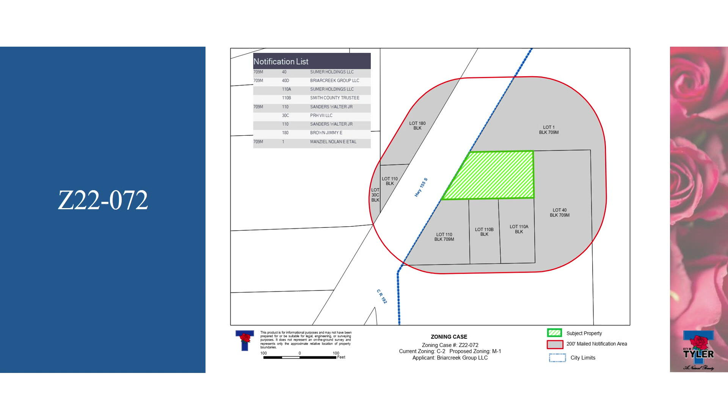All right, thank you. Any questions for city staff? If not, I have a card from Mr. Hines. Mr. Hines is available for questions. Any questions from Mr. Hines?

If not, is there a motion? Mr. Chairman, I make a motion that we approve Z 22-072. Second. Motion's been made and seconded to approve this item. I didn't ask if there are others who have questions or comments on this item. Are there? If not, the motion's been made and seconded to approve this item. Any discussion? All those in favor say aye. Aye. Any opposed? Item's approved.

Next, with the approval of the commission, I'm going to move item PD 22-023, Mother Frances Regional Hospital, up. Kyle? Yes, sir. This is a zone change request from AG Agricultural Zoning to PMF Planned Multifamily Residential.

The applicant's proposing to develop a multifamily development on this property, in the cottage housing style. These are units that are primarily detached, but on a single lot, so they do function as a multifamily development.

The adjacent properties within the city limits are also zoned for agricultural, as they were zoned that way when the property was annexed, so there's no other zoning at this time. Outside the city limits, properties are developed with a mixture of industrial and some residential uses, but this area is primarily undeveloped.

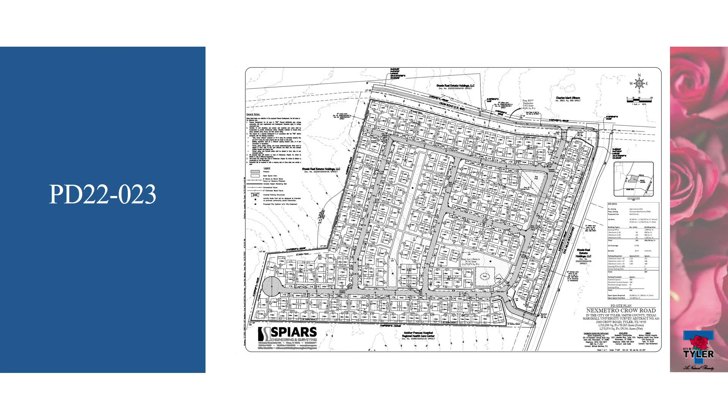As you can see, there are single-family units and some attached one-bedroom units on this site plan, located along the internal drive within the development as well as offset from that. These are the proposed units, 1 to 3 bedroom units with this development. The property will have access to Crow Road as well as Oak Hill Boulevard.

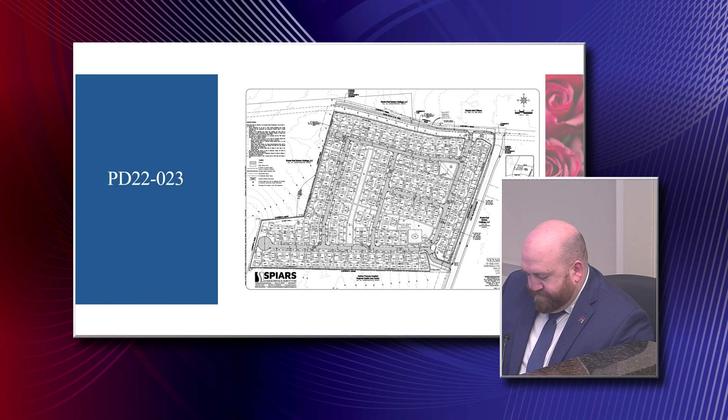Of the notices sent out, 2 were returned in favor, 0 in opposition. When we sent out the packet, we had some concerns about off-site drainage. The applicant has spoken to the neighboring properties and they're in communication on how that will work out. At this time there's no opposition to the proposed land use, and staff has reviewed the application and recommends approval.

Kyle, our packet shows an issue with stormwater runoff, but also with utilities. I didn't hear you speak about utilities. Have all the protests been pulled? Yes, that's correct. Okay, just wanted to confirm.

Are there persons here who'd like to speak on this item, for or against? Yes, sir, if you'd come to the microphone and state your name and the rest for the record.

Good evening, Chair and Commissioners. My name is Josh Eady, Vice President of Development for NexMetro Communities. We are the applicant on this case, 2221 Lakeside Boulevard in Richardson. I've signed in as a speaker, so it should be on there.

Kyle, I sent in a presentation—do you know if that got queued up? If not, I can just walk through it. This is fairly straightforward, and it's better for questions anyway.

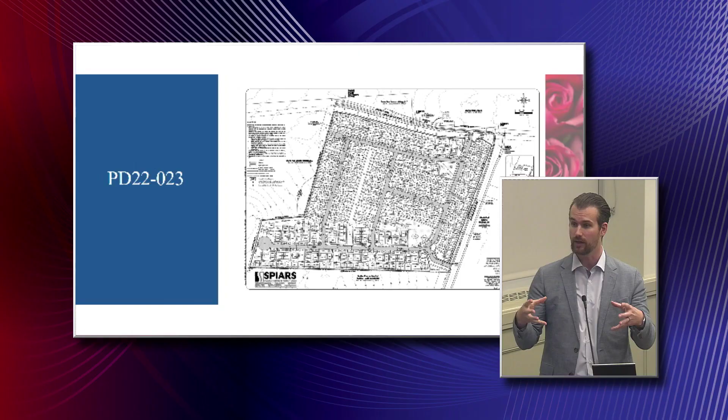This will be platted as one lot, so it will go through dedicating all of our fire lanes, utilities, and those sorts of things, just like commercial development. The leasing center, which is occupiable, will pull a commercial permit, unlocking the civil development there. The individual homes are residential permits you'd pull just like a neighborhood—so it's a bit of a unique combination.

Well, thanks. Any other questions, commissioners? All right, thank you, sir, for your time and presence here.

Are there others who would like to speak on this item, for or against? Any discussion? If not, is there a motion? Mr. Chairman, I'd like to make a motion that we approve PD 22-023. Second. Motion's been made and seconded to approve this item. Any discussion? If not, all those in favor say aye. Aye. Any opposed? Item's approved.

Good luck with your project and welcome to Tyler. We're now going back to the regular order, which is PD 22-024, the Blue Pinnacle Group, and thanks everyone for your indulgence with this slight change in the schedule.

Kyle? Lloyd, is this on? Yeah, we're on. Torelli's going to present this.

This is a zone change request from AG Agricultural District, C1 Light Commercial District, with a bit of PCD (Planned Commercial District) and PMF (Planned Multifamily). They're combining all of that, and requesting a zone change to PMF with the site plan.

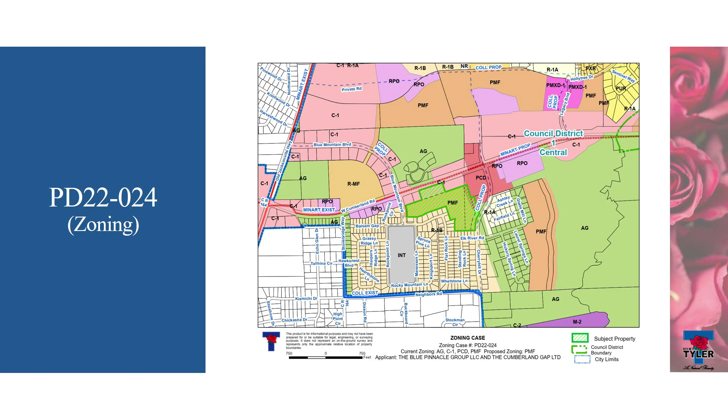Looking at the surrounding zoning, the property to the north is Roselawn Cemetery, and the properties to the east are zoned C1 and PCD, with a mixture of undeveloped land and a fire station. The properties to the west and south are all single-family homes zoned R1B.

Looking at the future land use guide, this is consistent with it, identifying the property as mixed-use center. That's the aerial view of the property. Let me pull up the site plan.

The applicant is proposing 274 single-family homes with a density of 14.3 units per acre, ranging from 1-bedroom to 3-bedroom units, predominantly 1-bedroom units, which is 167.

The main access will be off of West Cumberland Road, with a secondary access on Cherry Hill Drive to the east of the property. There's also a shared access easement to the west, which will complement the commercial properties there.

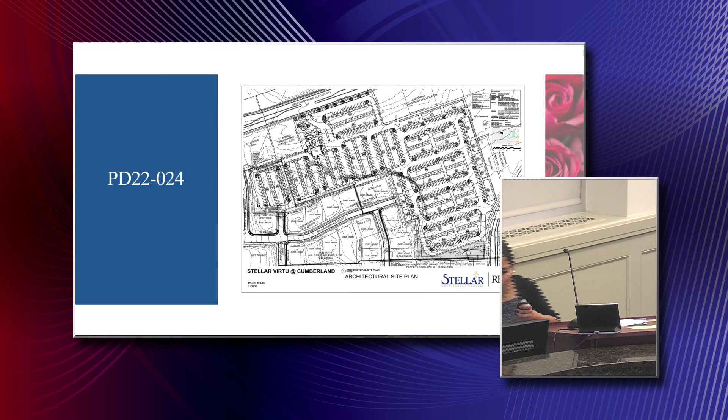Looking at the surrounding zoning, since there's single family homes to the south, there's currently an existing 6-foot wooden fence. In addition, the applicant is proposing a type A buffer yard. The site plan also shows green belts to the west and east of the property.

All staff have reviewed the request. There is pedestrian access, since Cameron, our traffic engineer, recommended it so people could access the school to the south. So pedestrian access and fire access to Manassas Lane is provided to the south. Parking, landscaping, and signage will also comply with the Unified Development Code.

They also provide some amenities to the north. You can see there's a dog park and also a pool up in the north.

Some history of the property: in 2008, a zone change was approved for this property for PMF. That was for 131 units, single-story attached, and this will also be single-story attached. But the access would be predominantly through the neighborhood.

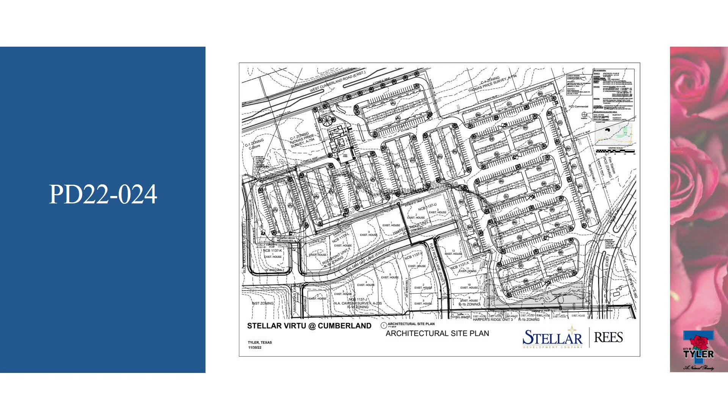The public street became a private street, and access was through the neighborhood, but this will be off of both Cumberland and Cherry, not through the neighborhood. That previous development was at a density of 9.42 units per acre, and this one is 14.3. That's the difference.

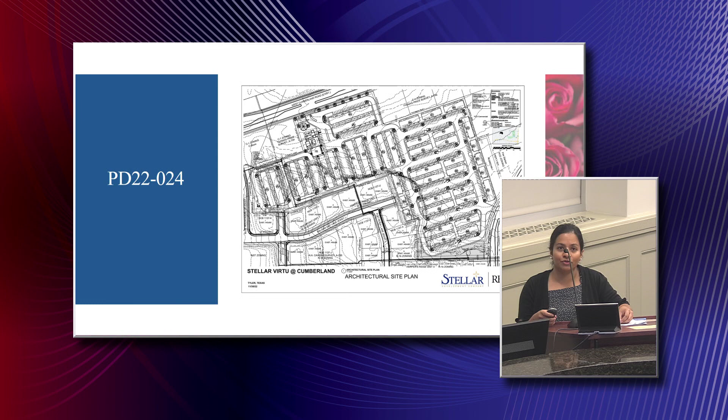And those are the styles of homes.

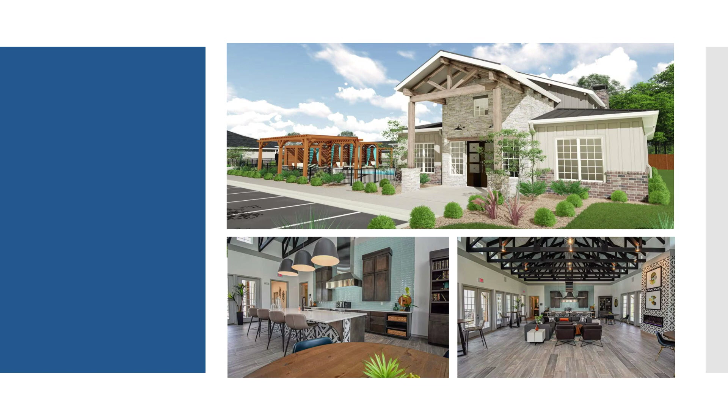Out of the 45 notices that were sent, 5 were received in favor and 5 in opposition to the request, with a total protest calculation of 0.63%. The opposition stated concerns mostly about traffic and drainage, and also privacy concerns. All departments have reviewed the application and anticipate no significant impact on services.

Staff has reviewed the request and recommends approval of this zone change with the site plan.

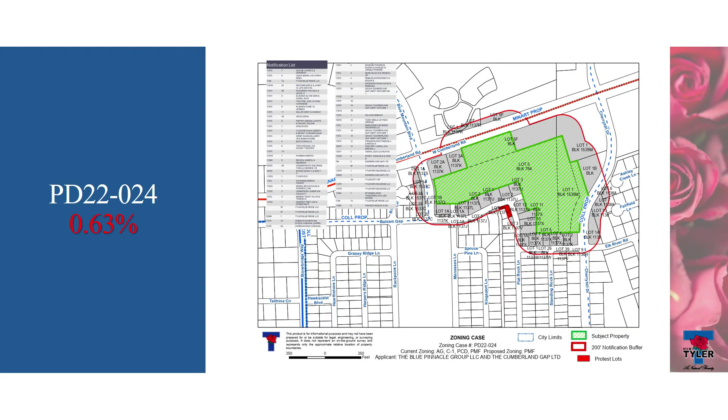Thank you, Thrani. Any questions for city staff? Thrani, I have a question. So the zone change in 2008 was 9.42 units per acre, okay. And then they're requesting 14.3 units per acre, is that correct?

Yes. Okay, thank you. And Durrani, you're suggesting approval? Yes. Okay, Brian,

I'm having trouble thinking of something that's remotely comparable in Tyler. Can you point me to anything that's comparable to this particular development? If it may not be, I can't think of anything.

I can't think of anything. Kyle, no, anything? Something that's similar to, like, a townhome, an apartment complex like this. I think we have quite a few of those.

I think the one at Grande and Copeland would be one. Not three-story, they've got an entrance. Yeah, that'd be a similar one, designed more for single, street or lower level access, compared to maybe like a 3-story complex.

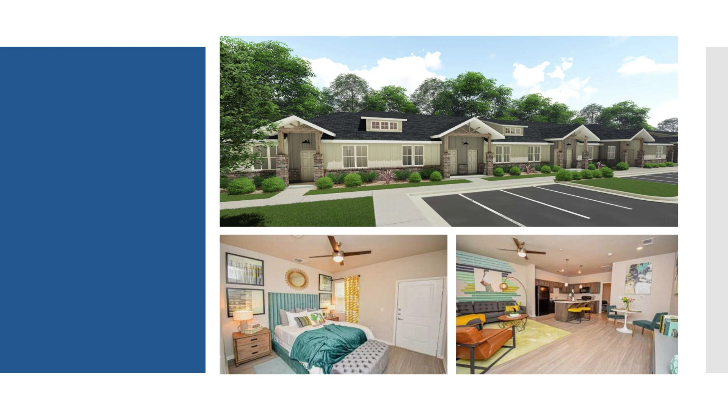A few months ago, we were here talking about a proposal for 3-story apartment complexes. This is much less intense than that.

I think one other thing to be said, and I'm not sure if the applicant's going to mention it, but the zone change would actually reduce potential commercial land uses in that area. So when we talk about traffic generation, it's actually reducing perhaps the expected traffic if those areas were developed as commercial. So it's down zoning some of those properties as well.

Okay, thanks. And they're all 1-story. Any other questions for city staff?

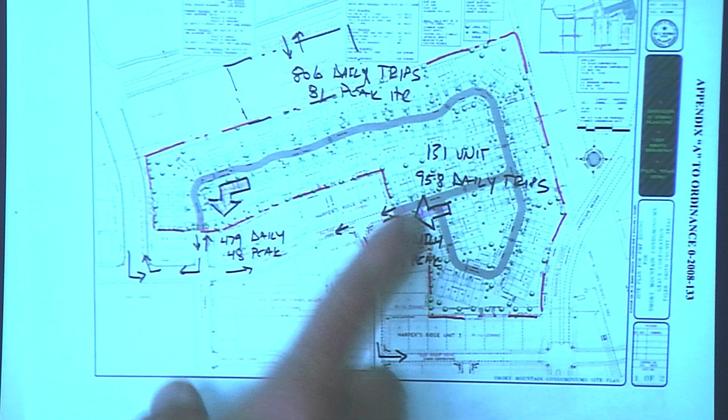Under the existing, the daily trips being generated were 958, all of them coming through this neighborhood, whether they came out to Cherry Hill this way, or up to Grande, or Cumberland this way. They all came through this neighborhood 100%.

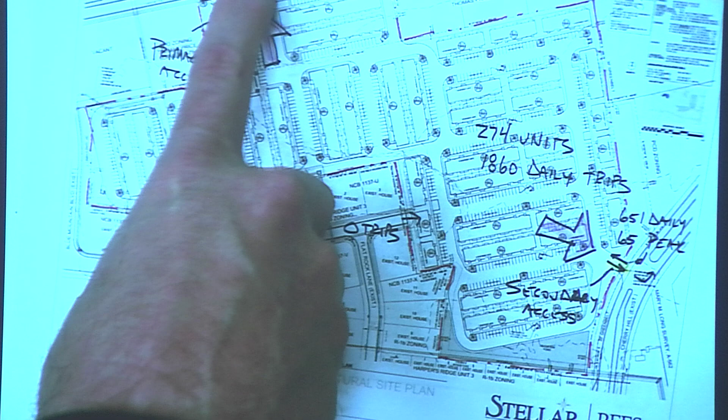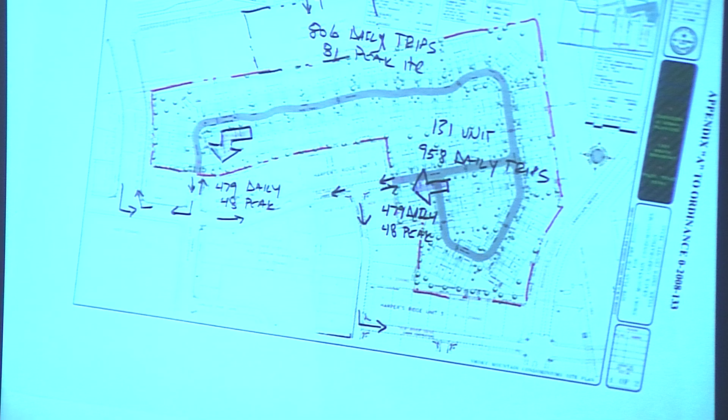Under the site plan we're proposing, there are 0 trips that come through this area. We're creating the trips coming up and out onto Cumberland directly, with a secondary access this way. So nearly all of the traffic is coming from this direction up. You will have some bleed over here, but it's a lot less than what was coming through this direction.

And then we're limiting them all to single story. So what we're trying to do is address all of those things we heard in the protest and from the neighbors on the overall height. Can we go back to this one?

So when we look at the overall site plan, we're pushing all of the traffic up to access this place. We've added the cross access into the commercial. Currently there's a C station under construction on the corner and a commercial lot next to it, but it gives cross access to get over to the intersection. So we're trying to reduce the number of trips up here.

We've got the drainage issues. We're proposing a detention pond back in this area. At worst, it will stay natural in some sort of creek form with a detention pond next to it. That will be the next step of the project, going through the engineering to see what's required from a true detention standpoint. But we've had the preliminary determination done, and this is going to stay in a natural form.

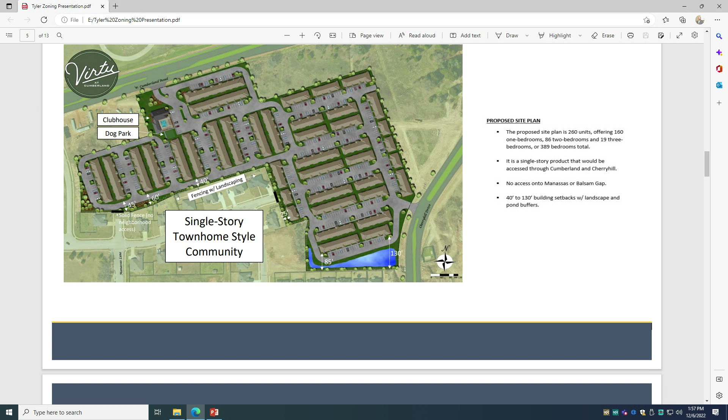So we're going to keep some sort of buffer there between the two. The last thing I'd say is we've oriented the building so we have minimal windows looking onto the neighbors. We're providing fencing, we've pushed them as far back as we can, creating buffer yards, and limiting the number of windows and access to it.

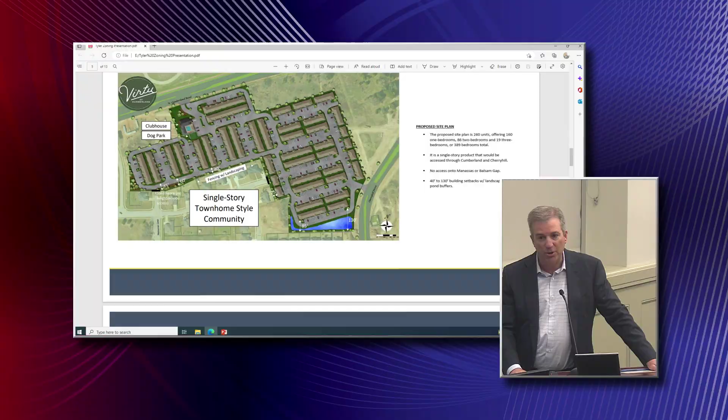But obviously, previously, a project had been proposed. I don't think it was responsive to some of the issues or the concerns of adjacent property owners. So we had a product that we developed in many different locations as a single-story product, and we felt like it would be very beneficial here and work very nicely.

I can go up through this and walk through. So you know the location, obviously, in South Tyler between Jackson and Broadway, highlighted here in front of you.

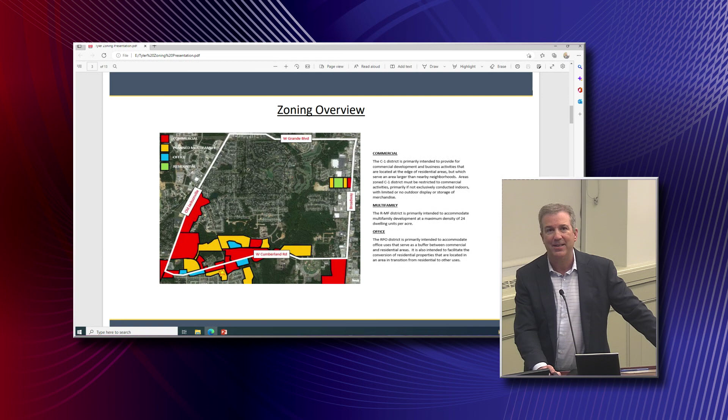Zoning in the area, we just highlighted the commercial, office, retail, and the multifamily used as a buffer, a common buffer between commercial and single family. You'll see that in several areas around us as kind of precedents.

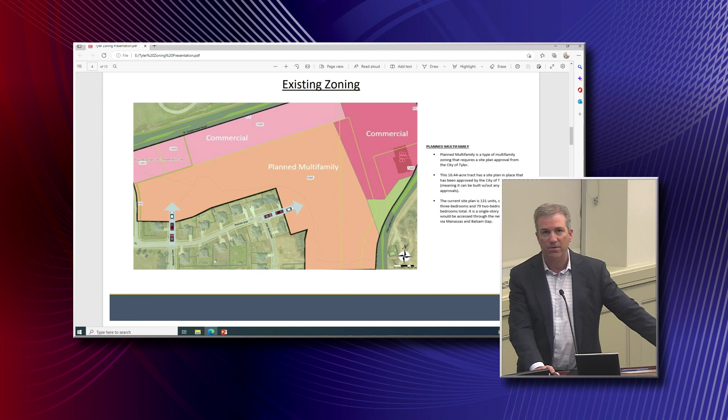The current zoning and site plan that was approved funnels all the traffic through the neighborhood. It's almost 950 some odd cars a day based on the current site plan. And that's what we're changing. We're asking for a site plan modification, and we take that traffic to zero through this site plan here.

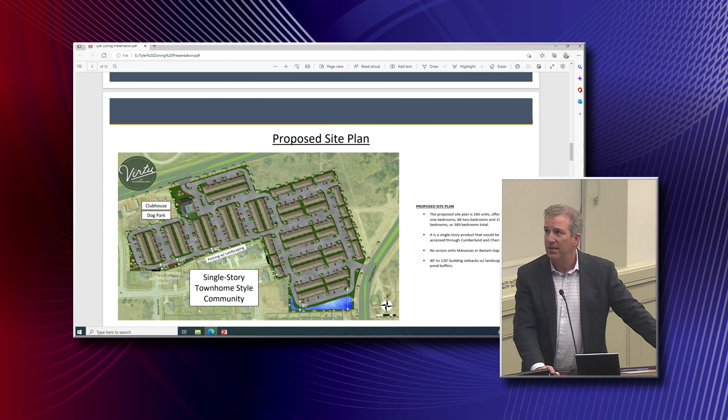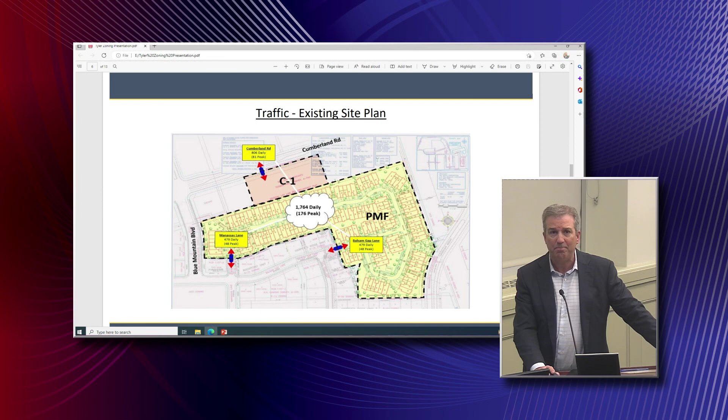A number of things we try to do is orient the buildings away from the homes, create setbacks. Our minimum is 25, but typically it's more 40 to 60 feet setbacks. We have them as great as 130 feet setback here. We added the C1 component so we could get access to Cumberland and provide vehicular access there, and that allowed us to eliminate all the traffic through the neighborhood.

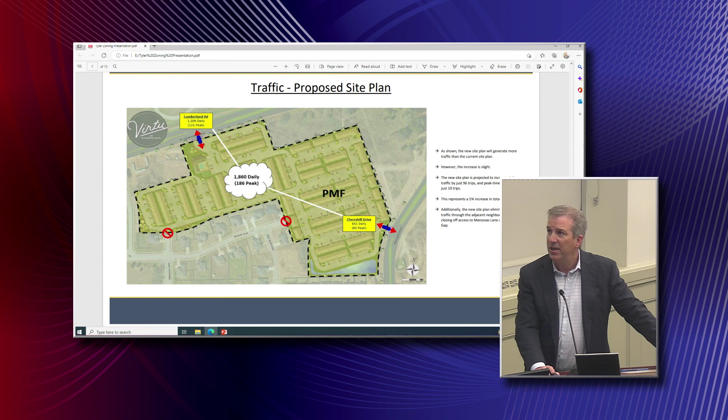And so there was a traffic study done, and in that traffic study you'll see the counts from the traffic there and the variance from the original plan and in our plan. That was done by Haft and Associates here in town.

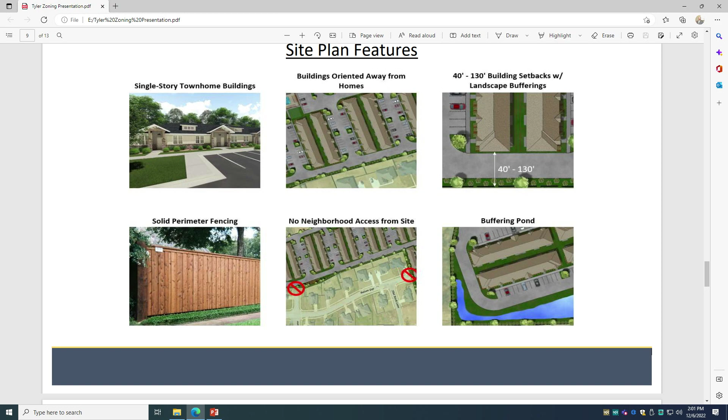So it's a low density, single story townhome style project that appeals to both young professionals who will be working in the medical community, as well as empty nesters who are changing from managing a house on their own and wanting to be in an environment where they can have more freedom and not have the maintenance and hassle of home ownership.

This depicts some of the same things that we went over earlier. We had a request. We sent out information to every lot and homeowner within 200 feet and gave them our contact information for them to reach out and communicate.

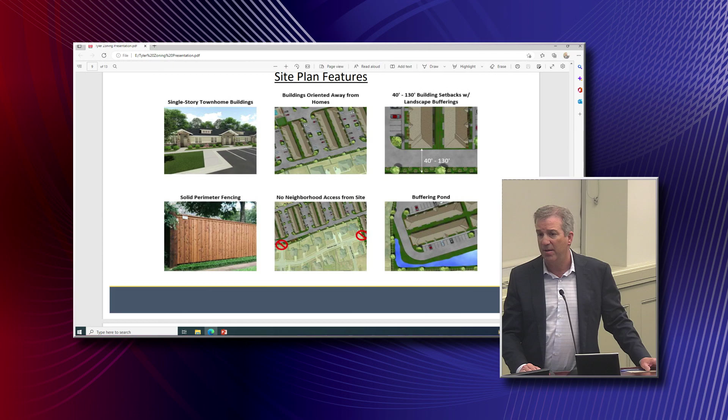We talked to several of them. We had a lady here I spoke to earlier that wanted to have some screening fences done, and we're certainly agreeable to that on Blue Mountain, the street that comes into the school. So we're going to put a screening fence there with some brick columns.

So we've had some questions. People have called. We've given them this packet of information and want to work collaboratively with our neighbors.

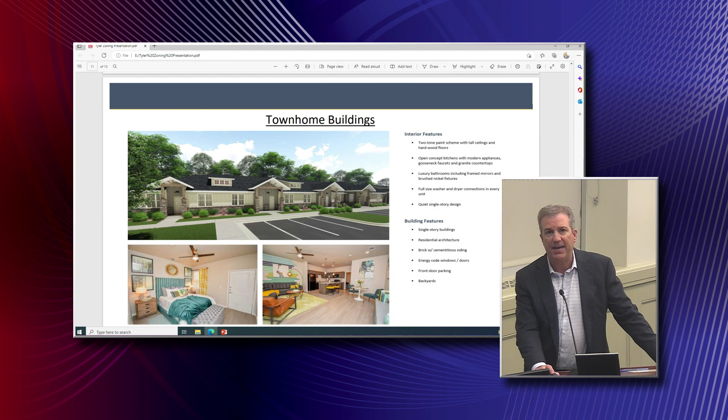Typical amenities in a multifamily project, you have a clubhouse with a swimming pool, we have cabanas out by the pool, outdoor kitchen, those kind of things, fitness center, business center, coffee lounge. And then the interior units have your tall ceilings, open floor concepts, modern appliance packages, contemporary light fixture and plumbing fixture appointments, hardwood floors, things of that nature.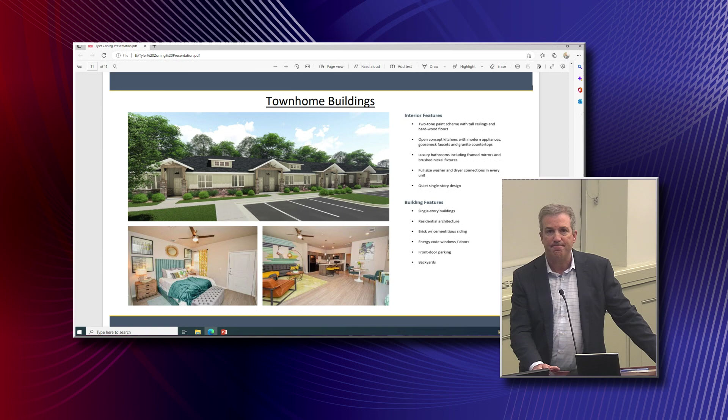In the homes, mostly one bedrooms. Here's a site plan here. Probably about 60% one bedrooms and the rest focused on 2s and 3 bedrooms.

Again, young professionals and we get empty nesters. We get some older than empty nesters - I'm looking for the right term - elderly who don't want to walk steps. It's very appealing to them.

Our approach is to work collaboratively with our adjoining neighbors and stakeholders, departments, people at the city. We've met with Tarani and the fire department. They requested a fire gate. We're certainly willing to accommodate that.

Our commitment is to try to build something that is beneficial to the community surrounding us and something that is a blessing to those who live in it. So if you have any questions, I'm happy to answer any questions you might have.

Thank you, Mr. Steele. Any questions? These are all leased units. Yes, sir.

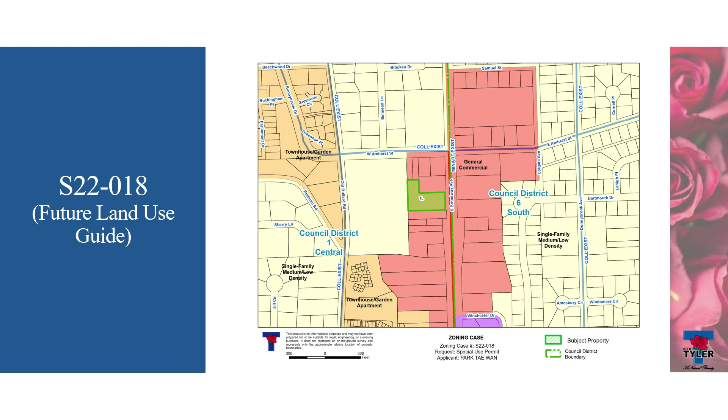Let me open up the site plan that was submitted. They're currently proposing 9 food trucks shown on the upper property. This is an L-shaped property. They're planning to use the existing building to the south for the commissary and also for the restroom facilities.

Major food truck parks like these need a special use permit as per the UDC. They also have additional regulations that need to be followed. It needs to meet all the building codes, health regulations, and any federal and state laws, and also the Unified Development Code, all the regulations need to be met.

As for the parking, because there were some concerns regarding the parking in this layout, they are not showing the entire parking in the property, but let me go back to the aerial. There are parking spaces to the south as well, closer to the building, so that comes up to a total of 36 parking spaces.

The Unified Development Code requires, as per the parking regulations, 2 parking spaces per food truck, which brings it up to 18 parking spaces. I believe the applicant is proposing a seating area inside the building, and for every 100 square feet of seating area, there has to be 1 parking space required. So that would limit it to 1,800 square feet of seating area inside, bringing the total parking up to the 36 spaces in the subject property.

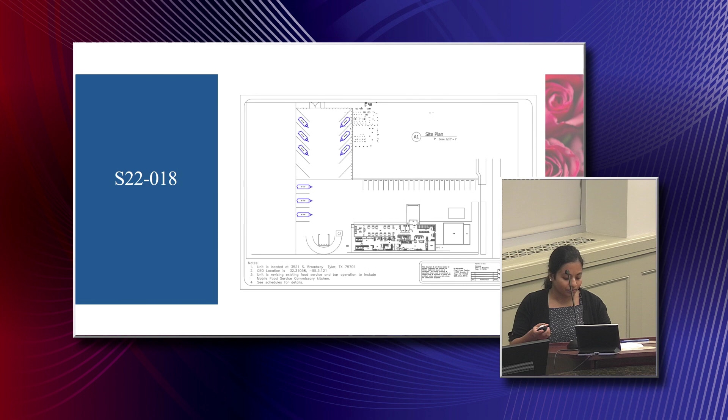Also, that's the aerial view. Out of the 16 notices that were sent, none was received in favor or in opposition to the request. Since this is the first time, and since there were questions about traffic and impact, staff has reviewed the request and we recommend a special use permit for this food truck park for 1 year.

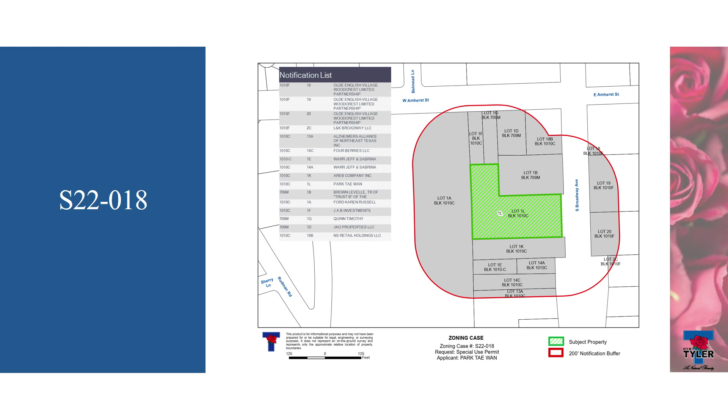All right, Thorny, thank you. Any questions, commissioners?

I think it sounds like it checks all the boxes in regards to what the UDC requirement is, and we don't have another food truck park in town that is operational that we can base any real comparison on. We don't have a basis for it.

I have a concern over the number of spaces that would be required for nine different food trucks. At least the ones I've been to are extremely popular, so my primary concern is the number of parking spaces being provided. I know staff is recommending approval, but are there any other staff concerns about the number of parking spaces, or do you know whether the applicant has talked to neighbors about additional off-peak hours parking?

The applicant has not shared any details about that, but the UDC does have a regulation that states that if any property is within 1,000 feet of the food truck park, they can have a joint use agreement or a shared parking agreement and make use of that.

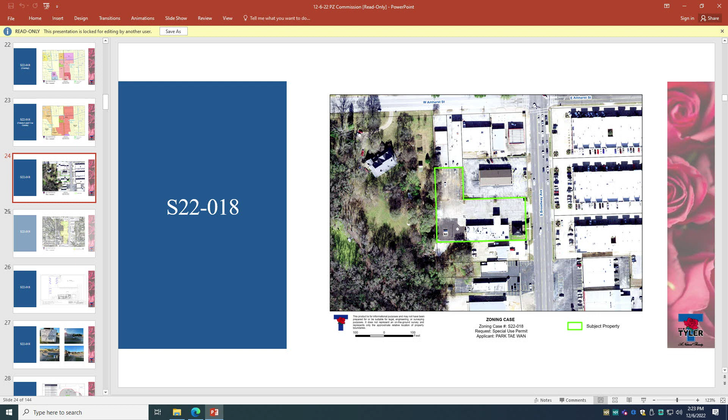Let me show you the aerial photo. We made a comparison with the Broadway Square Mall, so people can not only park in the facility but walk a bit further. This lays out the site of the Broadway Square Mall and these properties, and the applicant could make use of a shared parking agreement with these properties so people can park here and walk up to the food truck park.

At this time, I don't think they have any shared parking agreement or joint use, but if the commission feels that's the route to go, it could be added as a condition in a special use permit.

I'd add that a lot of the other properties south of here appear to be office, so off-peak, depending maybe on a lunch crowd, might be different, but they seem to be off-peak. So if an issue arose, maybe they could work with adjacent or nearby property owners to have a shared parking agreement.

What this shows is, if you overlay it, in case there was concern about walking distance, this is walking from one end of the mall to the other, which is kind of what's acceptable to many people. So this shows what parking facilities exist in the area, if they'd want to get permission to utilize that, or that may be an issue.

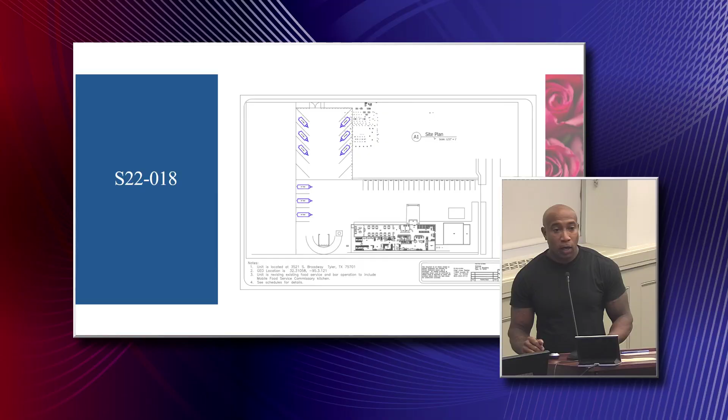I'm gonna ask if the applicant's here. Yes sir, if you'd like to come to the microphone, state your name and address for the record. My name is Todd Kane, and my address is 1327 River Road. Where you see the 6 food trucks, I can rope that off where people can't drive up to the trucks. When you was talking about the handicap, if I need to start with less trucks, I can do that also. And for us, the parking, we have a nail salon, and we have the cleaners or whatever, we all share the parking lot. They use my parking lot, and I can use theirs. I can get that on paper, like a permit if you need that.

I think for my personal feeling, we don't have a precedent, or we do have a precedent, but I question whether it's appropriate or not in regards to the number of parking spaces. So I would say if there was something that was a part of the special use permit where we're not putting an undue pressure or burden on your neighbors in regards to parking, I think that would help me specifically.

So basically, I just need a permit showing that it's a joint use parking lot? I think staff could probably help you with that. So the nail salon's to the north, correct? Yes, right there, and you're saying that they share the parking lot with your facility to the south? Right. And so they currently share your parking where Shogun's used to be? When her parking lot is full, when people get nails done, they come over and park. Right, and right now there's no active business on your property, so they're coming over and parking on a piece of property that's not active.

Well, then we'll have 2 active businesses. If they're overflowing to you now, and then y'all go to overflow to them, we're out of parking, and you might get some conflicts. So I think what we're saying is if you could get some type of shared parking agreement with them, where they understand that your clients will use yours and theirs, so you'd share the parking together, just a mutual agreement between the two of them. I think that would really put us more at ease with the parking situation. What will be the time span for your park?

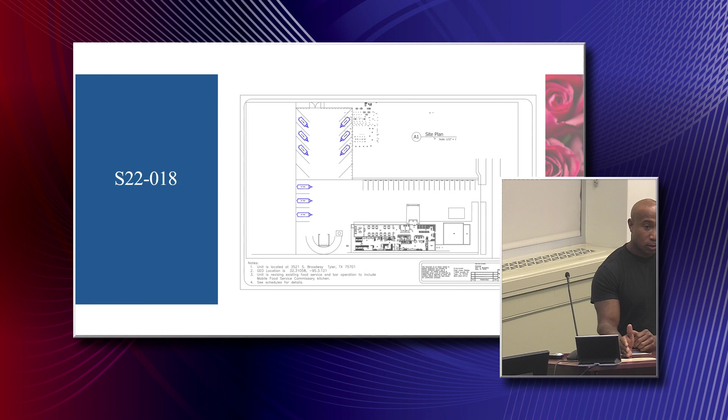So if that person who owns this food truck or trailer, they can park in the empty space. You see what I'm saying? They don't need a parking space separately. Those spaces there would be for parking for the food truck people with their food truck or trailer also. It's enough space, yes.

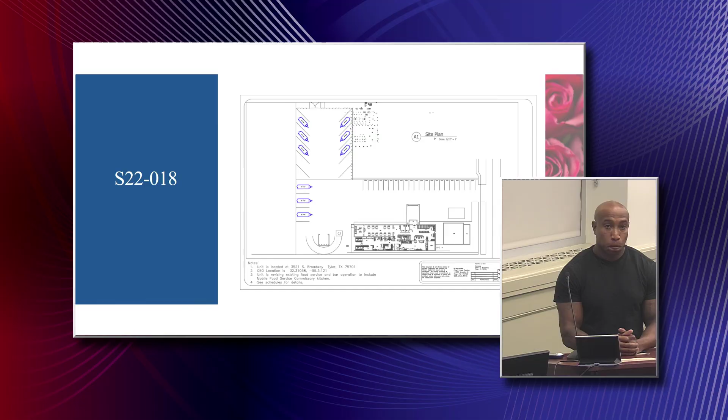I just see the ability to delineate, like what you're saying, roping off that north section. I see that as being a positive if you reduced it from 9 down to 8, and they were all condensed on the north side, with additional parking on the west side as well. So it would be a reduction of 1, allowing for circulation and a little more parking in addition to some shared parking agreement stuff.

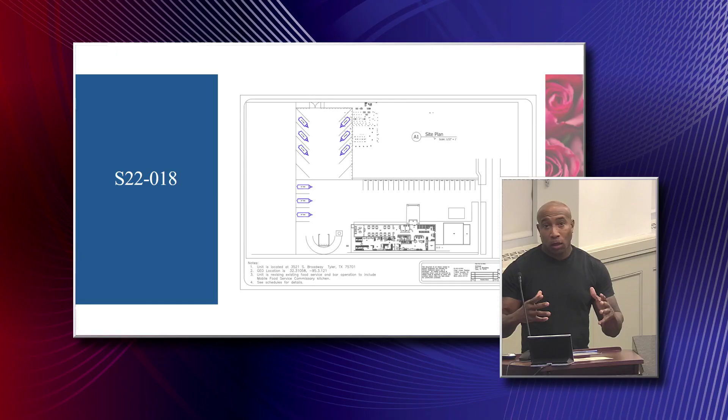And the way I was thinking also, when you have the 3 trucks, like I have a food trailer, I was thinking I can put the trailers here and someone else has a trailer where they can just back up instead of trying to back in at an angle. So I can take one of 8 for whatever. Okay, yeah, I think that's a good solution.

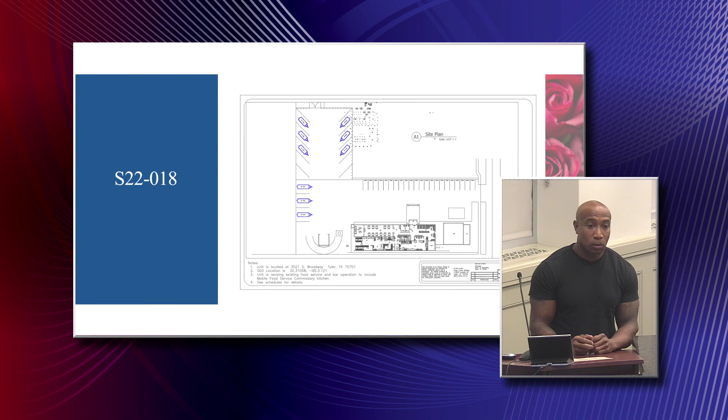I mean, it seems like you could create a fair amount of extra parking on that southwest quadrant with some angled parking, one-way drive around. You could probably get 20, I don't know how many more, but I'd feel better about that. And it's a back access way, like you can get out the backside of that too.

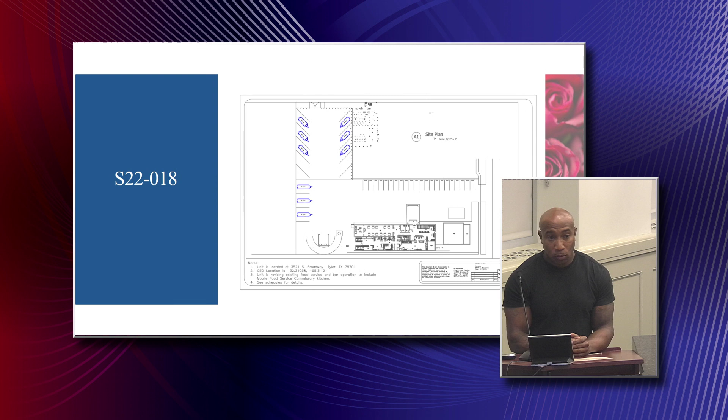Past the food trucks up north, on the north side - what I'm saying is when you have that line where the 6 trucks are, you can drive straight through that. It's an opening on the backside. But you said you were going to rope that off. Yeah, I can open it - I'm just saying if people still need to get in and out, I can open that up, like for fire trucks and stuff, where they can come straight through.

Oh, you mean for an emergency or something? No, for regular use. Okay, I like that idea Jimmy had, have 4 on one side, 4 on the other side, make this parking, along with the shared agreement for the parking. And are you all selling beer and wine also?

Not at the moment, I would like to, but I'd rather get this approved first before I take that next step. Because that'll have people staying a little bit longer, like sitting down with the tailgate lift up.

So, Deronnie, would we need to table this in order for him to implement it? We just do a stipulation, we just stipulate. Okay, bet Jimmy can come up with a motion on that. Yeah, Jimmy, go ahead, Jimmy. Mr. Reed, would you...

Anybody else care to speak? Is there anybody else here who'd like to speak on this item? I didn't see anybody.

If not, I'll make a suggestion. You do understand this is, if we approve this, it's with the exceptions. It's only for a year. You have a responsibility during that year to run a good shop.

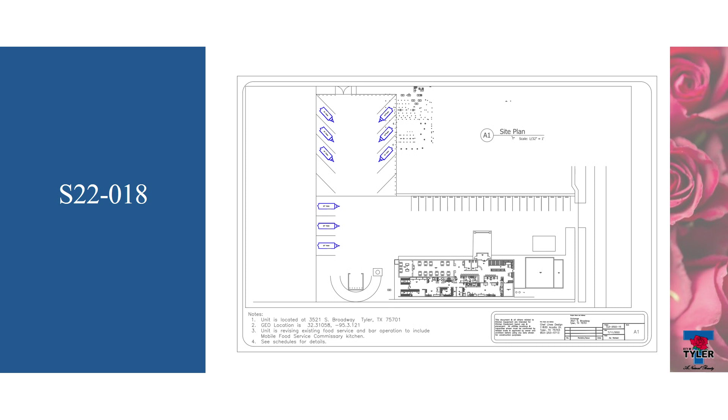Mr. Chairman, I'd like to make a motion that we approve S 22-018, stipulating 8 food trucks only on the north quadrant and parking for the balance of the remainder, also including a shared parking agreement with the property to the north. Second. And that permits for that, and the special use permit is for 1 year.

Motion's been made and seconded. Any discussion? All those in favor say aye. Aye. Opposed? Item's approved. Good luck with your project.

Mr. Nichols, is this next one yours? Let the record show that Lloyd Nichols has stepped out of the room. We'll find out if the chair can remember to call him back or not. Some question about that.

All right, Z22-069. This is a zone change request from R1D, Single Family Attached and Detached Residential District, to RMF, Multifamily Residential District. This is a property that's located west of the intersection of Shiloh Village Drive and Shiloh Road.

The applicant is requesting a multifamily development on this property. Looking at the surrounding zoning, properties to the north are zoned PCD, planned commercial district, developed with commercial uses. Properties to the west are zoned RMF and already have a multifamily development in the area. The property to the south is PUR, planned unit residential, developed with single-family homes. The properties to the east are R1D, attached and detached single-family residential district.

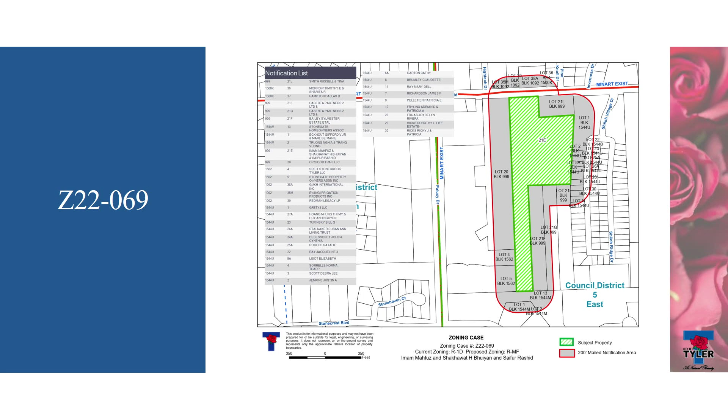Also, Shiloh Village is a minor arterial street developed with multifamily and commercial uses all around, so this would be consistent in the area. Staff has reviewed the request and recommends approval of this zone change from R1D to RMF.

Would you mind showing the aerial one more time of the existing structures? Just to look at it again. Yeah, 32, yeah, perfect, thank you.

I'm assuming the protests were on that western side. Back to the aerial map. You said there's already a 100-foot buffer on the west side, is that right? Yes, that property is actually owned by the Stonegate HOA. I believe they must have purchased that from the apartment complex to preserve it, so there's a buffer there, but it's provided by the owner, which is Stonegate.

Did you say something about the protesters requesting a buffer? Yes, the Stonegate subdivision requested a 100-foot buffer. Oh, the Stonegate, okay. And Ronnie, you said they would mostly be concentrating on building further north? Where does the creek run? So why are the residents concerned if they won't be building on the southern section of that? That's a buffer in itself. I believe they have not seen the site plan or any plans yet, which is why they were concerned the development would go closer to their property.

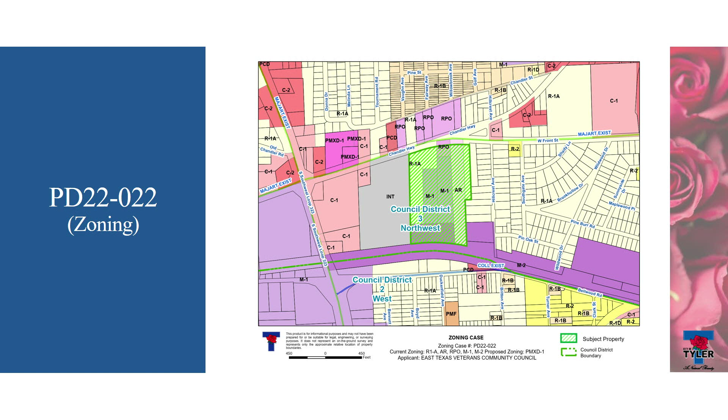The next item is PD 22-022, East Texas Veterans Community Council. This is a zone change request from single family R1A, AR adaptive reuse, RPO restricted professional and office district, M1 light industrial and M2 general industrial to planned mixed use district 1, PMXD 1, to allow for a mixture of uses to serve the expansion of the Camp V veterans facility on this property. This is located along Chandler Highway, where Camp V is currently, they have a headquarters there with some uses there in the office zoning. Property is currently zoned office where they're currently operating, but they do plan to expand the operation to include a mixture of other uses such as an activity center.

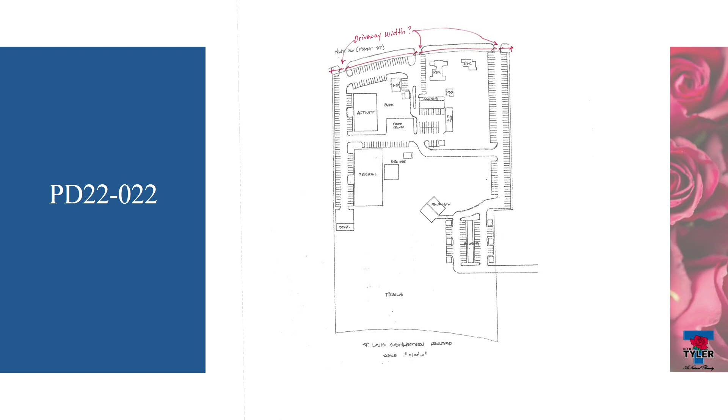Let me go to that really quick. Activity centers, food truck park, some other things, some housing in the south side of the property, transitional housing for veterans, and then just some office and therapy kind of services as well.

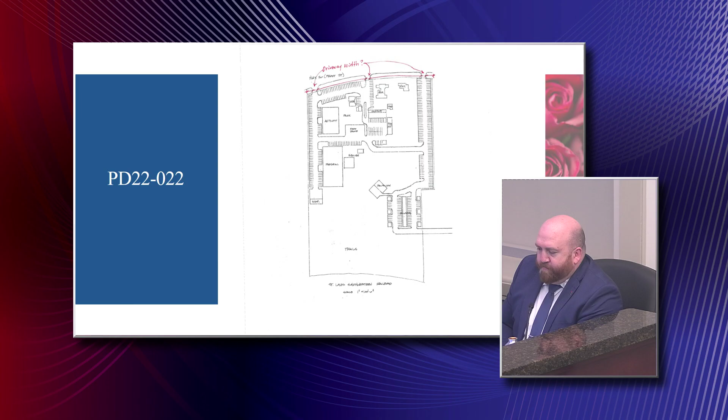At this point, the staff is still working with the applicant because there's some additional details needed to evaluate whether the proposal would meet all minimum requirements and go through that full review. So at this point, staff would recommend tabling the request for an indefinite period of time to allow, especially with the holidays and things like that, additional time to review and get more information. If, like previous items we had today, once we know it can be scheduled, we would re-notify and go through that. So, like I said, at this time, staff would recommend tabling the item indefinitely.

Any questions for city staff? Because this item was posted, persons here who might have an interest on this item are welcome to speak. I don't have any cards. Are there persons here who'd like to comment on this item? Staff recommendation is to table indefinitely. Mr. Chairman, I make a motion that we table PD 22-022 indefinitely. Second. Motion's been made and seconded. All those in favor say aye. Aye. Any opposed? Item is tabled indefinitely. Y'all, persons who are interested in this, if you'd stay in touch with the city staff.

Next is Z22-068, Ramirio Borja. This is a zone change request from R1B single family to RPO restricted professional office district. This is for a property located on the Northwest Loop. As you can see here, the property is located there in green, surrounded by single family zoning. On the east side of the loop, on the west side is commercially zoned.

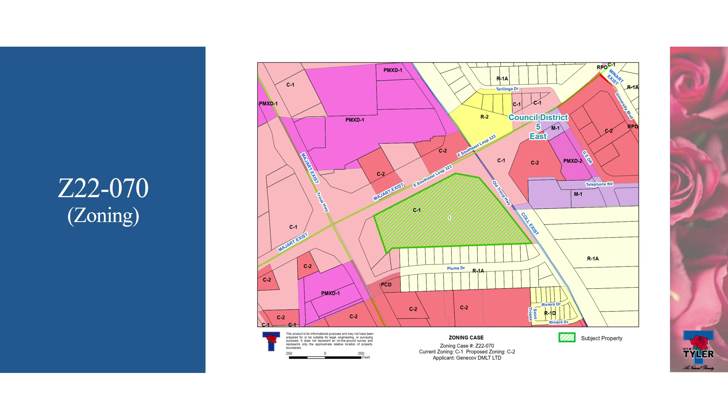This is a zone change request from C1 Light Commercial District to C2 General Commercial District. This is located near the Troup and the Loop intersection. It's the location of the Green Acres bowling alley. The owner of the property is requesting to rezone this to allow for additional commercial uses. They currently don't have an intended use or change in use, but their request here is to essentially match what they see in the area with other C2 properties along the loop. You do see C2 to the east and also further to the south.

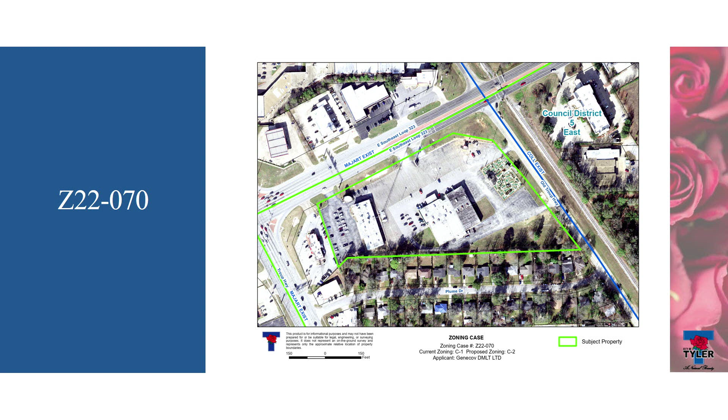The request is consistent with the future land use guide, which shows it as mixed-use center. There is a neighborhood to the south, but the buffer yard doesn't change between that property whether it's C1 or C2. There's also C2 further to the south. Staff has reviewed the request and recommends approval of the zone change from C1 to C2.

Any questions for Kyle? If not, are there persons here who wish to speak on this item? Yes, sir.

Good evening. Thank you guys for your time today. I'm Andrew Snodgrass with Benchmark Design Group, 2026 Republic Drive. Here representing Genecov for this today. Really just here to answer any questions you have. Kyle did a good job explaining it.

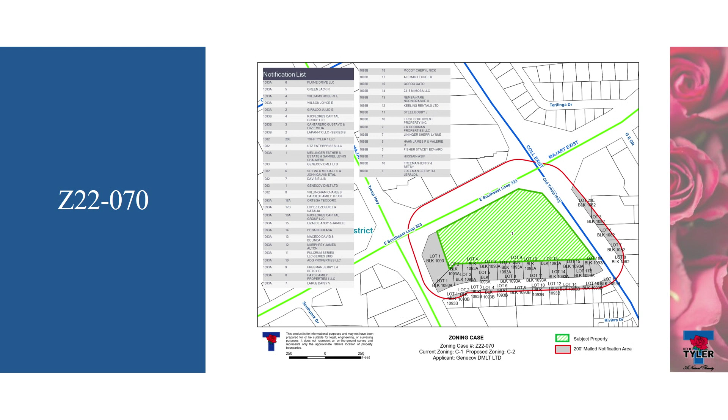We don't have anything proposed or coming right down the pipeline for this, but I know they've been approached in the past about either development opportunities or sales opportunities on this property. Being zoned C2 is a less restrictive zoning, which allows them, if the right opportunity came along, to be able to move on it instead of having to worry about a contract falling through during a rezoning process. So again, there's no immediate plans for it, but just here to answer any questions you guys may have or relay those back to the owner.

All right, thanks. Any questions? What's the main difference? So C2 would allow for outdoor display. That's the bigger difference. But C2 will allow for temporary uses outside as well. I think usually a C1 zoning, that becomes an issue as well. So the main difference is outdoor display.

Thanks for your time and presence. Any others who wish to speak on this item? If not, would a commissioner like to make a motion?

Mr. Chairman, I make a motion we approve Z22-070. Second. Motion's been made and seconded to approve this item. Any discussion? If not, all those in favor say aye. Aye. Any opposed? Item's approved.

Next is Z22-071, Rentiera.

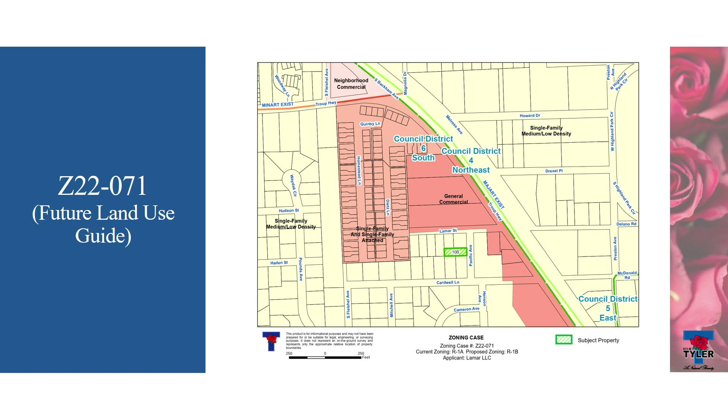Under current R1A zoning, the property would not meet minimum lot size. So R1B zoning will eliminate that barrier and allow for a lot size that would be 6,000 square feet.

Of the 13 notices mailed, no notices were returned in favor of the request or in opposition to the request. Staff has performed a technical review and finds it is generally consistent with the approval criteria. However, the applicant later mentioned that they would like to include the two properties to the north for the zone change, so in order for them to really get a house of the size that they're wanting in the rendering, they would like to eventually move the lot line as well. So staff recommends tabling the item for 30 days, so we can re-notify the area and include those two lots to the north in the notification zone.

All right, thank you. Any questions for city staff? Are the persons here who wish to speak on this item? If not, the staff's recommendation is to table for 30 days.

Is there a motion? Mr. Chairman, I make a motion we table Z22-071 for 30 days. Second. Motion's been made and seconded to table this item for 30 days. Any discussion? If not, all those in favor say aye. Aye. That brings us to plats.

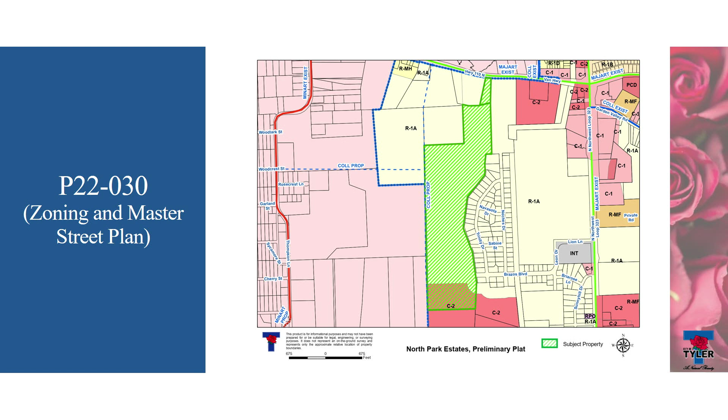Thorani. Yes. P22-030, North Park Estates. This is a preliminary plat, a plan for a 12 lot subdivision, approximately 35 acres of land, located in the Tyler ETJ, extraterritorial jurisdiction.

The purpose of the plat, there you go, let me show, is to plan for a 12 lot subdivision. All the staff comments have been addressed and the staff recommends approval of this plat.

All right, thanks. Are the persons here who wish to speak on this plat? If not, the Commissioner would like to make a motion. Just a point of clarification, is it 12 or is it doesn't look like 12? It doesn't look like 12. Yeah, this is for a 105 lot preliminary plat.

This is over by Tyler High School. But I think the number was correct, I think the name was correct, I think just the quantity of lots. Yeah, just want to clarify. All right, do we know the right number now? 105? Is that right? Yes. Okay, all right.

Yeah, this is a preliminary plat. This actually is a future extension of Jordan Plaza Boulevard, which goes into Highway 64 west, as you can see it on the south side there. It does have an alignment into that future street there, which will extend north, and that collector street would eventually go into Highway 110.

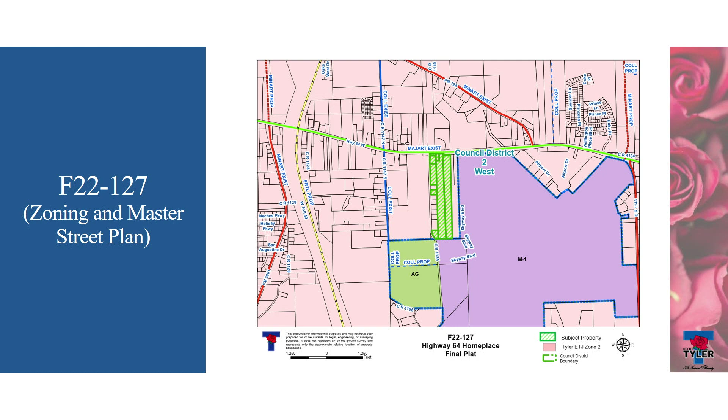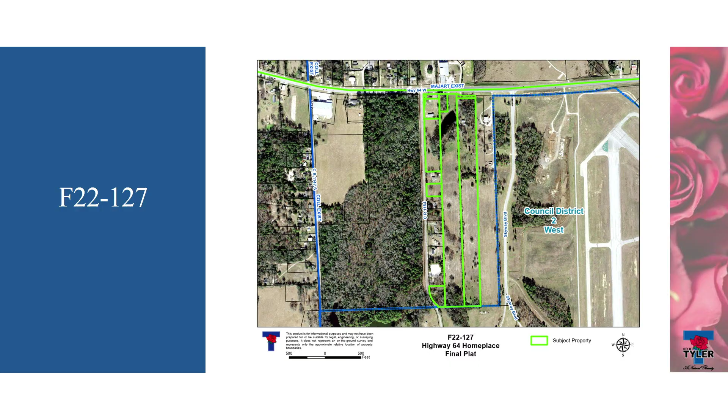This is a 27 lot subdivision, approximately 39.9 acres, located in the city of Tyler ETJ, at the southeast intersection of County Road 1134 and Highway 64 West. All staff comments have been addressed at this point, and staff recommends approval of this plat.

Thank you, Thorani. Questions for Thorani? Are there persons here who wish to speak on this item? If not, is there a motion? Mr. Chairman, I make a motion we approve F22-127. Is there a second? Second. Motion's been made and seconded. Any discussion? All those in favor say aye. Aye. Any opposed? Item's approved.

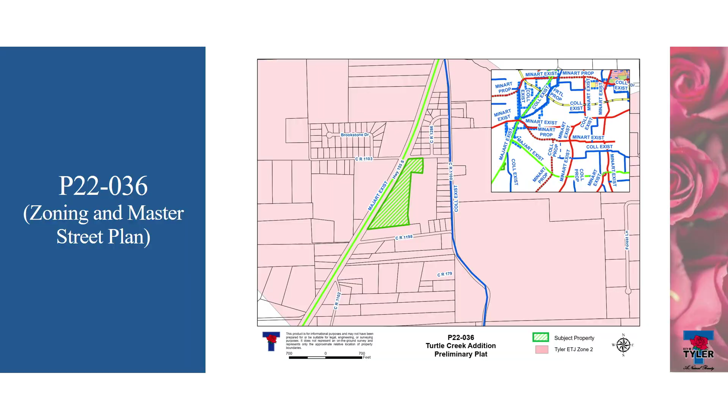Next is P22-036 Turtle Creek Addition, preliminary and final plat. The next two items are the preliminary plat and final plat of the same property, but let me go over each one. This is a plan for a 5 lot subdivision, 12.70 acres of land, also in the Tyler ETJ, located at the southeast intersection of County Road 1103 and Highway 155 South. They're subdividing this one tract into 5 individual lots. All staff comments have been addressed, and staff recommends approval of this preliminary plat.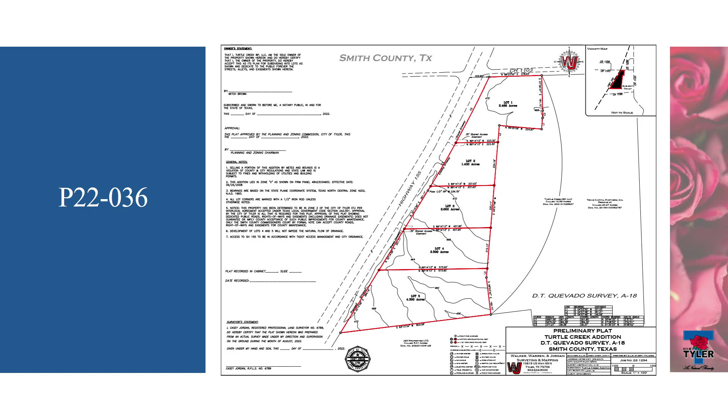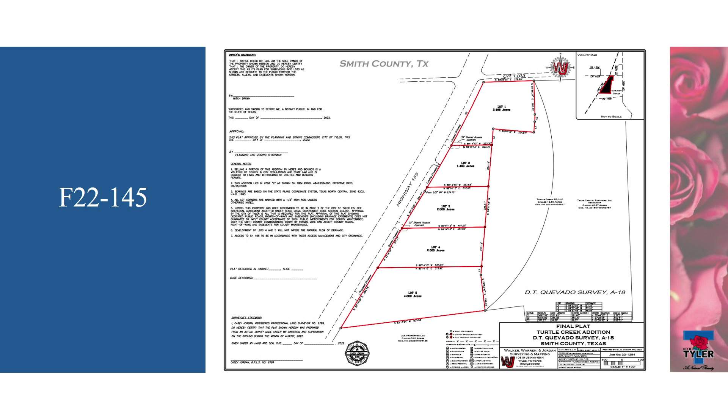Thank you, Thorani. Questions for Thorani? Can we approve both of these at the same time? Yes. P22-036 Turtle Creek Addition preliminary plat and F22-145 Turtle Creek Addition final plat.

Are there persons here who wish to speak on either of these items or both? If not, staff recommendation is to approve. Is there a motion? Mr. Chairman, I make a motion we approve P22-036 and F22-145. Second. Motion's been made and seconded to approve both of these. Is there discussion? If not, all those in favor say aye. Aye. Any opposed?

Next, F22-149 Bellwood Addition Unit 1 final plat. This is one of our exciting projects coming to town. This is a 9-lot subdivision, just the first phase of the development, 53.38 acres of land, located at the northwest intersection of Earl Campbell Parkway and Loop 323. The property is currently zoned PCD. Again, it's just the first phase of the development, and all staff comments have been addressed, and staff recommends approval of the plat.

Questions for Thorani? If not, any person here would like to speak on this item? If not, is there a motion? Mr. Chairman, I'd like to make a motion that we approve F22-149. Second. Motion's been made and seconded to approve this item. Any discussion? All those in favor say aye. Aye. Item's approved.

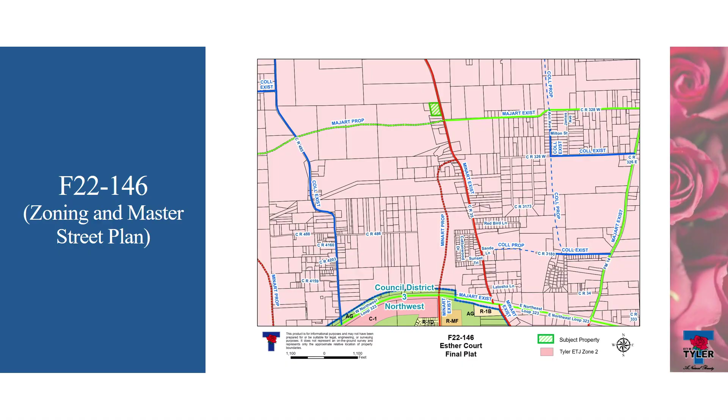Next is consent plats Group B. Are these still not to be approved? Items 1, 2, and 3, which are Esther Court preliminary, Esther Court final, and Britton Brookshire Subdivision final plat, all three of those can be approved. The final item, number 4, Claremore Addition, still does not meet the technical criteria for approval.

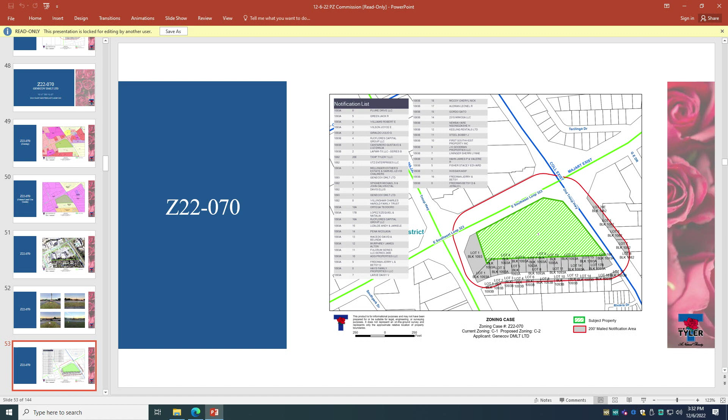Is there a motion to approve P22-039 Esther Court, F22-146 Esther Court final plat, and F22-128 Britton Brookshire Subdivision final plat? Mr. Chairman, I'd like to make a motion that we approve P22-039, F22-146, and F22-128. Second. Motion's been made and seconded. Any discussion? If not, all those in favor say aye. Aye. Those are approved.

And F22-148 Claremore Addition third amendment, that is not eligible to be approved, so staff recommendation is to deny. Is there a motion? Mr. Chairman, I make a motion that we deny F22-148. Second. Motion's been made and seconded to deny F22-148. All those in favor say aye. Aye. Plat's denied. We're now in recess.